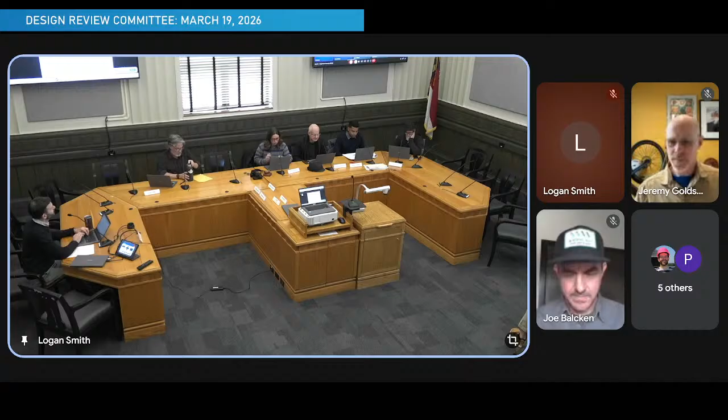And our first order of business is a formal design review, but before we get into that, I wanted to let you know that I will be stepping down as chair as my family and I are relocating. So at the next meeting, you will vote on vice chair and chair. I've enjoyed my time, so thank you.

And the formal design review is 50 Coxe Avenue, and Will is going to present that for us.

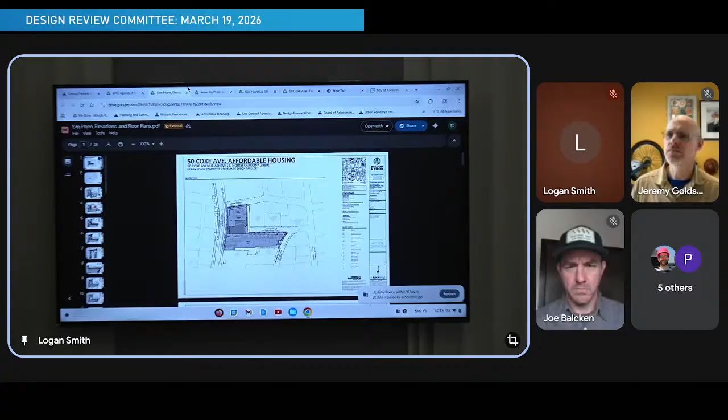Thank you, Chair. Good afternoon, members of the committee. Will Palmquist with Planning and Urban Design. I will be presenting this design review for the project known as 50 Coxe Avenue. I want to welcome our applicants here today and say we're excited to present this project. It's a mixed-use affordable housing project proposed on Buncombe County-owned property. We've been working with them as partners as best we can, and we're glad to be here today to present this project. I'll go over an overview of the project, go through some of the staff analysis and recommendations, answer whatever questions you have, and then I know the applicants want to be able to present some information to you all too, and they'll be available for any questions you have as well.

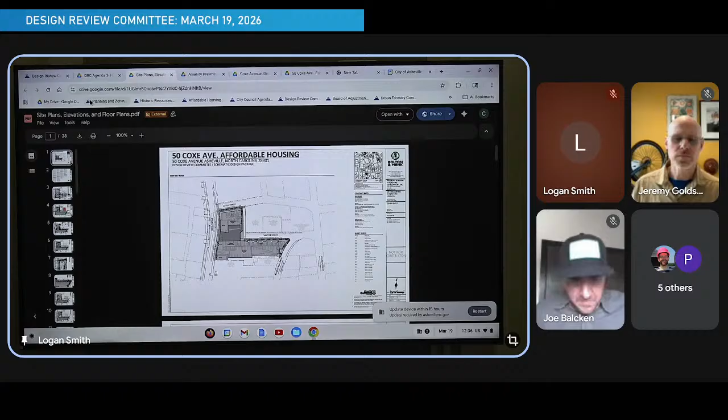So just to get started, I'm going to be referring mostly to the site plan drawings. As mentioned, the property here downtown with the main address of 50 Coxe Avenue, is located across 3 properties owned by Buncombe County. They're used for administrative offices and such for the county, but I don't believe they're active right now.

The project is zoned CBD. It's located outside the traditional core. It's in the tallest height zone, and then it has multiple frontages on streets, one of which is Coxe Avenue, which is a key pedestrian street, which has some special implications for design guideline standards and UDO zoning requirements. So that's kind of the main primary frontage of the site. There's also frontage on Aston Street, Sawyer Street, and Ravenscroft Drive. Additionally, there's an alley that exists between the property and the existing building to the east that'll be proposed for circulation around the site as well. I'll talk a little more about that in a minute.

So here you can see the site plan proposed. Overall, it's a 7-story tall mixed-use building with 203 multifamily units and about 5,000 square feet of retail space on the ground floor. The overall building area is 251,000 square feet. There's also 121 spaces of parking, structured parking, proposed in 2 levels. The building itself is an interesting design. It's kind of an L-shaped building, and it does span over the former section of Sawyer Street, the right-of-way of which was officially closed about 2 years ago.

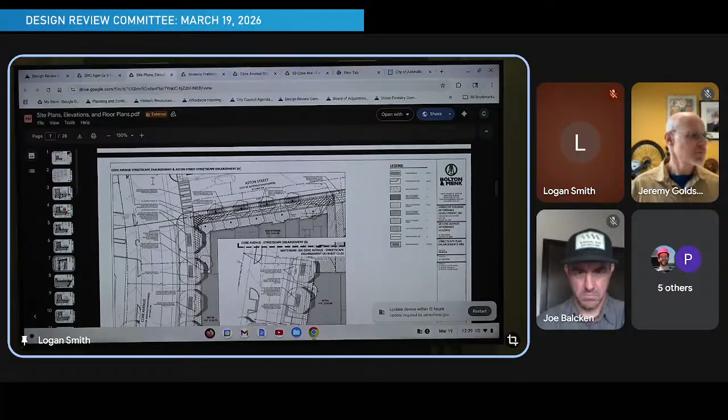I'll scroll down a little bit here too. You can see some closer-in views of the streetscape plan along Aston Street to the north and then Coxe Avenue to the west in particular.

This project is kind of interesting because it's being designed at the same time that the city-led project for the Coxe Avenue streetscape is underway. It's a project being led by Capital Projects in our city, and it is a redesign of the entire streetscape and cross-section of Coxe Avenue from Patton Avenue to Southside Avenue. They're currently around the 75% design phase. So this project team has been working closely with our capital project folks and consultants to incorporate the proposed cross-section, right-of-way, sidewalk, and street tree locations so that when they build the project, they'll be able to do it in a manner that complies with that overall streetscape vision.

So I provided some more information about that project in the folder, but it's essentially wider sidewalks, travel lanes, and then an uphill climbing bike lane on what would be the east side of Coxe Avenue. You can see here the proposed sidewalks, they vary between 10 and 12 feet along all the frontages, and then there is a 6-foot wide sidewalk proposed along the alley connection.

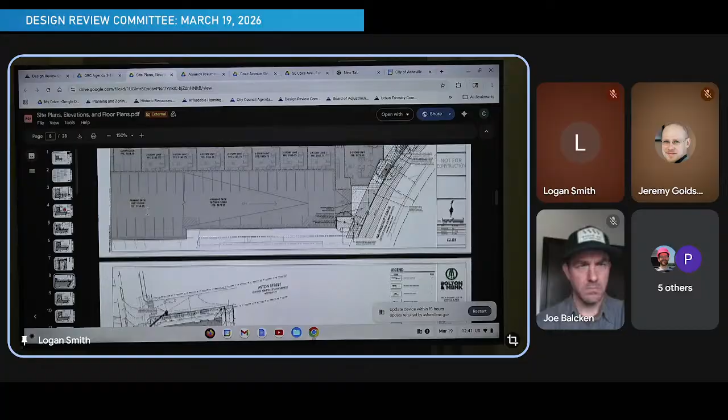Speaking more broadly about the circulation around the site, it's a little peculiar with the closing of Sawyer Street, but because there is that alley that runs north, it will allow any vehicles traveling down Sawyer Street to the west to head north up that one-way alley, get onto Aston Street, and then be able to go either direction from there. So they won't have to turn around or do a three-point turn or anything. That'll keep the vehicular motion through the site relatively coherent.

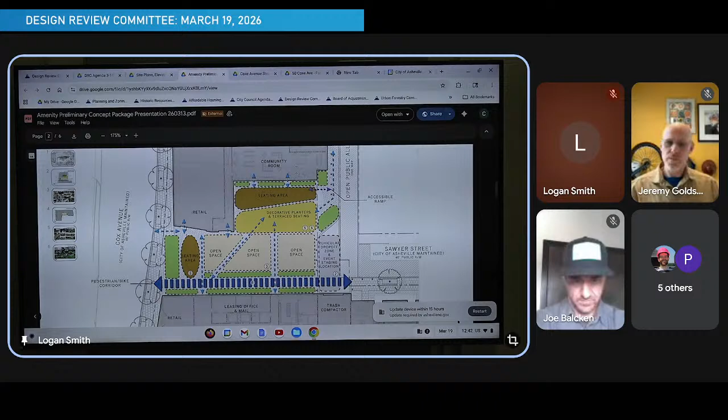So there are some unique aspects to this project, as previously mentioned. I'm going to flip to the amenity plan package that the applicant sent over, and they'll probably speak more about this, but just to give a brief overview of some of the concepts being proposed for that plaza space beneath the building. You can see that the main pedestrian bike corridor will run through this area of the site to connect Coxe Avenue with the sidewalk on Sawyer Street. There's also some room for what they're calling a vehicular drop-off area and event staging location for any kinds of programming that happens in the space, with open space area, seating areas, and then decorative plantings and some other terraced seating in this portion of that area. It will be, just a note, covered by building for the majority of this area, so any kind of plantings or anything will have to be very carefully considered to ensure their viability.

Also, there are some illustrative images. I'll let the applicant team speak more to that.

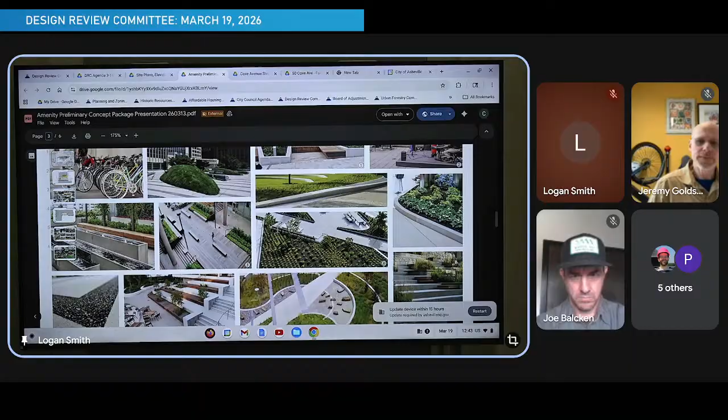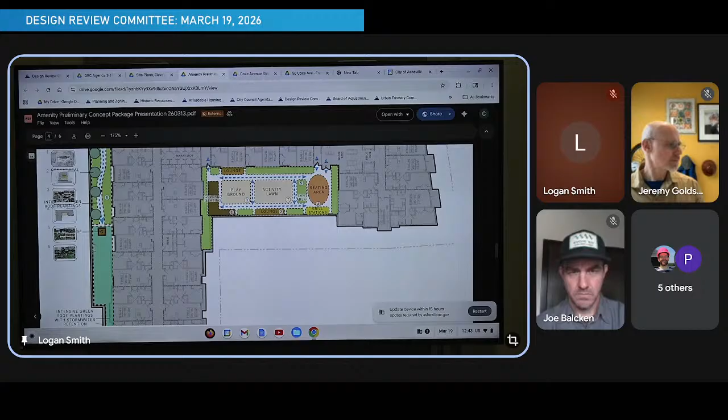On the third floor of the project, there is a proposed amenity area in the central part of the building. There's also a green roof proposed on the southern part of the building, north being to the screen right. That area will have stormwater infiltration and treatment retention capabilities in order to collect and treat the rainwater that falls in that portion of the building.

So if you go to the floor plans, we can see that illustrated here as well. This is the first floor plan. It shows access off Coxe Avenue to that one level of parking deck.

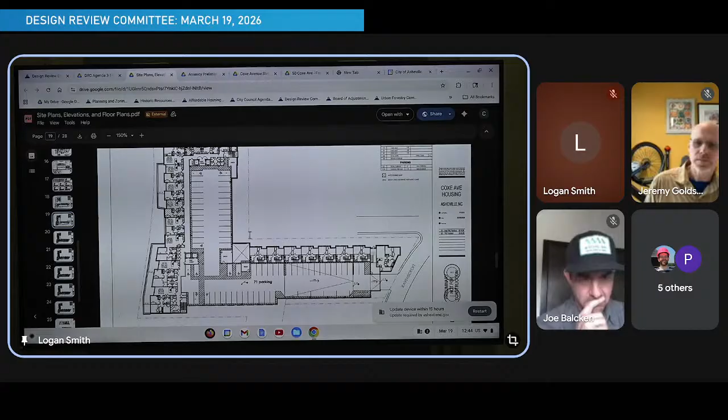You can see the recessed area between the buildings on the first floor where the plaza is. The second story demonstrates access off Ravenscroft, with the parking structure that follows along the building footprint to the west and the north as well. The third floor plan, on top of that parking deck, is where the rooftop amenity is located, and then that green roof on the southern side.

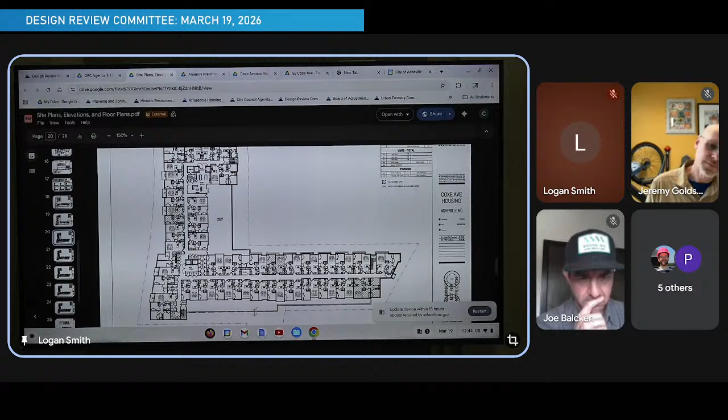And then I will flip to the elevation drawings and speak through these briefly as well. I mentioned the materiality proposed for the project. I'm going to go to the main elevation on Coxe Avenue, if I can get it to behave.

Some materials proposed include a brick running bond pattern along the first story of the project. There's also fiber cement siding, cementitious board with metal reveal, and then that glass storefront system you see for those retail spaces. You can see those identified on the two sides of the parking garage entrance, and also the one side on the other side of the plaza.

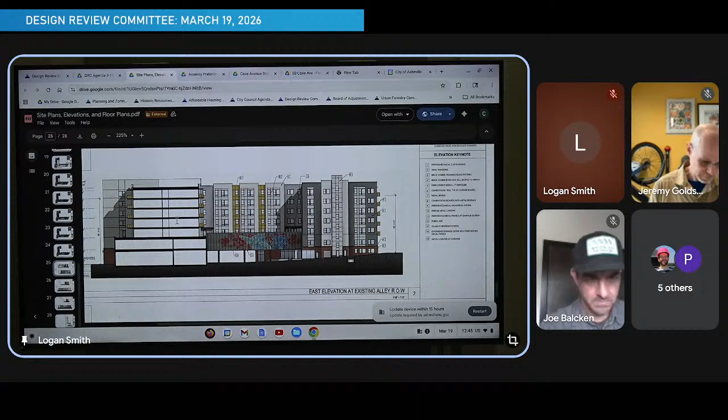The other elevations are a little hard to visualize because of the interesting geometry of the building and the site itself. But essentially this would be looking east, as if you're walking from Sawyer Street to that recessed pedestrian area. You can see there's a screening element on the second story of that parking structure, and then the cross-section of the building that runs east and west is located here.

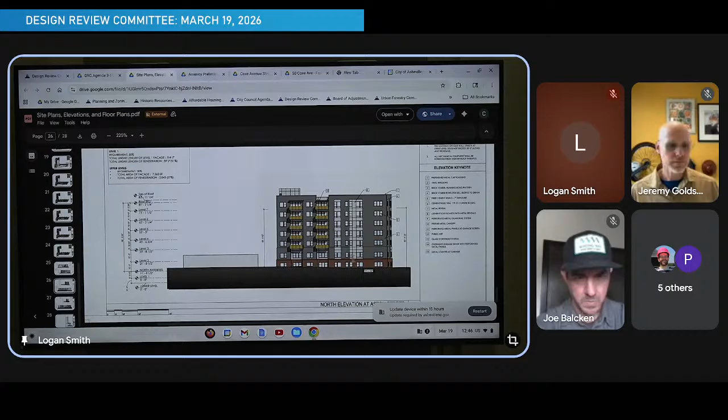So other views of the building - this is the north elevation. If you're walking down Coxe Avenue to the south, you would see this on the left side there. And then another view at Sawyer Street itself, so you can see the L-shaped building.

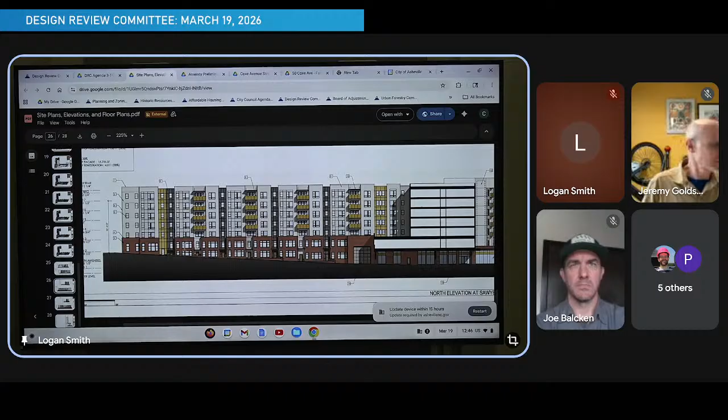Another interesting element of the project is that along Sawyer Street, there are proposed to be these townhouse-style units. They're 2-story tall units, designed a bit off of the building as a different type of residential space. You can see those here off of Sawyer Street - there's, I think, 8 of them.

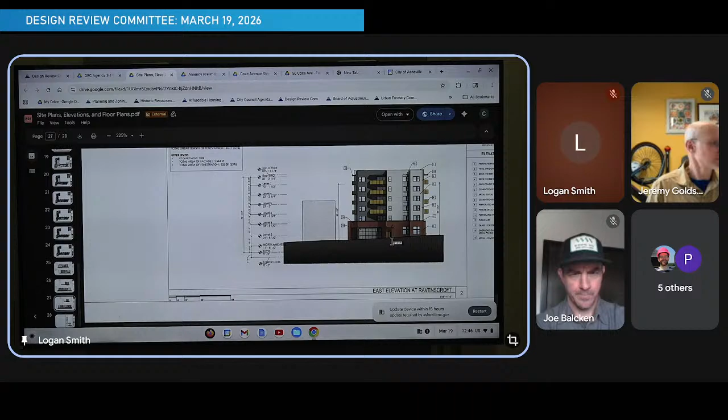This is a view on Ravenscroft Drive, and you can see that entrance to the parking garage there. And then finally, the view that you probably wouldn't see because there's buildings in the way - this is the south elevation. So if you're walking on Coxe Avenue going north, you would see this off to the right. So I hope that's oriented you all to the site a little bit better.

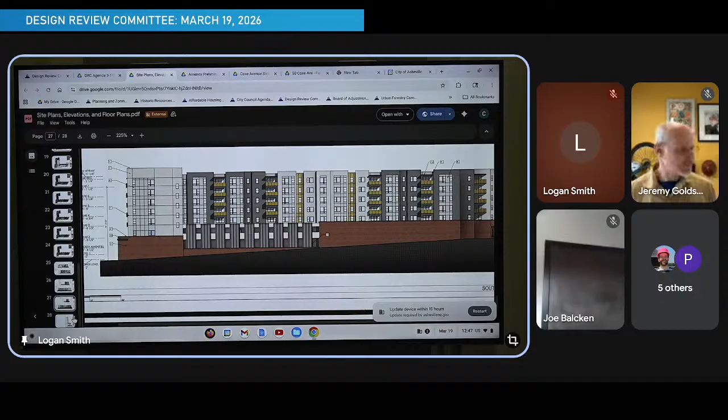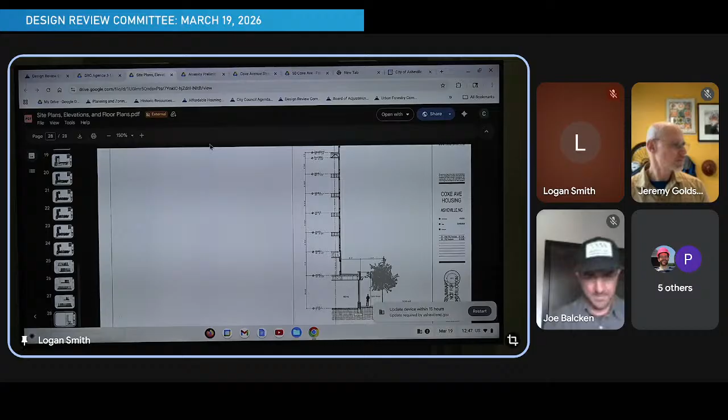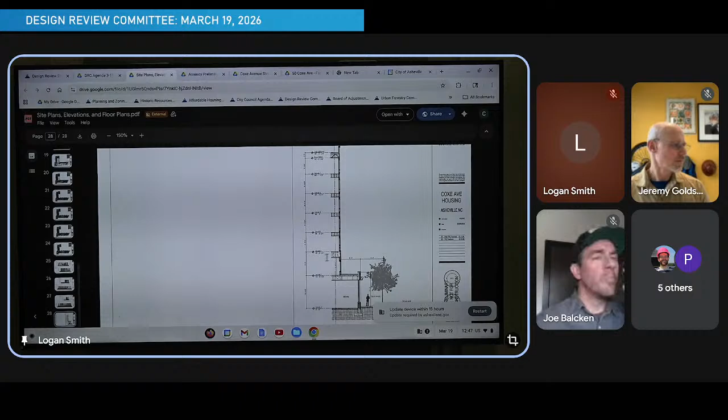Some other technical aspects of the project: it's largely in compliance with standards such as the UDO requirements for the CBD district, as well as the downtown design guidelines. There are a couple of technical modifications to the zoning requirements that the project is requesting, which will go through review mainly by the Planning and Zoning Commission and then ultimately City Council, if they approve the project with those conditions. One of which is regarding the setback and the street wall height for the portion of the building along Coxe Avenue.

In the downtown, all buildings are required to basically step the building back 10 feet, so you have this recessed area to provide relief and not have buildings looming over the street. It's required to happen based on usually the width of the right-of-way, or at a specific height if you're in a certain area of downtown in the traditional core.

Also, all buildings in the downtown are required to be 2 stories in height, and this has been interpreted to mean that all portions of new buildings have to be 2 stories in height. This project is proposing a 1-story step back. Based on their design, the floor plan, and that sort of thing, they felt this was the best design and appropriateness for the project.

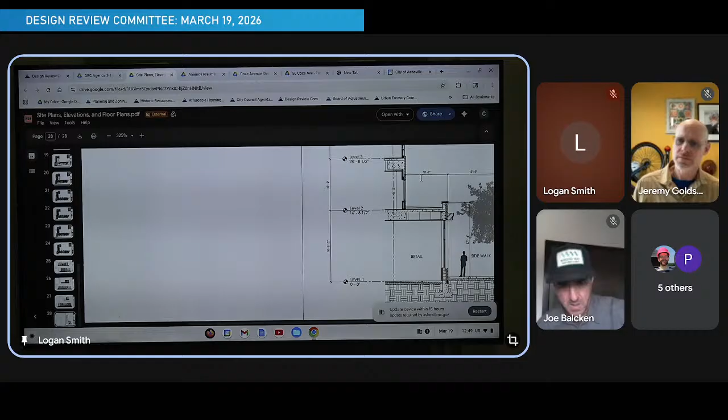So you can see it outlined here that the retail space is located here. There's the 10-foot minimum step back for the building relief happening right there at that second level, so that would have to be a modification to the zoning since that does not technically meet that requirement.

Question: the 10-foot doesn't, or the 1 story? Answer: the height, the 1 story. Question: the 10-foot does, though - that's still the first request? Answer: Yes, this one issue. It meets the requirement as far as the 10-foot depth, and then along at least two-thirds of that frontage, so that's in compliance. It's just that technically it'd have to happen at the 2nd story or higher.

So it's a design element that you all can consider, but the ultimate decision about whether that's an allowed modification would be up to City Council and considered by Planning and Zoning Commission as well. But obviously, it's a design consideration for you all today.

The other element, which is less of a design element, is regarding the tree canopy protection requirements. Tree canopy protection involves either the preservation of trees, the planting of new trees, or paying a fee in lieu instead of doing those other two items. This site doesn't really have any trees on it. There's really nothing to preserve, and the opportunity to plant is limited. The fee in lieu can kind of add up when you're downtown. The per square footage cost is relatively high compared to other areas of the city.

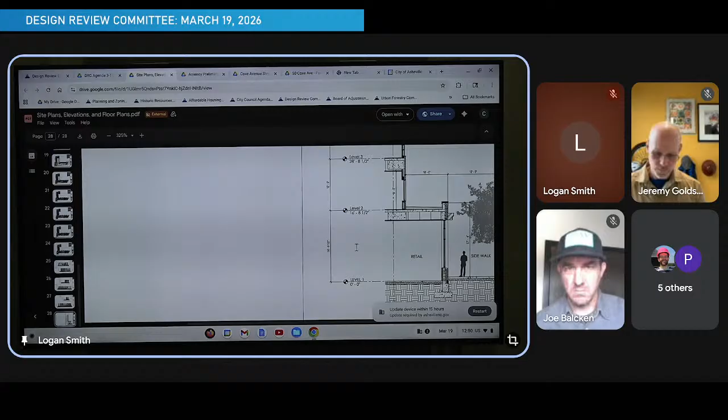So what the applicant team is requesting is that they will provide as much tree canopy on site that they can plant. And essentially, if the proposed street trees can count towards that new planting, which typically does not for projects, then they can meet the requirement. So essentially they're asking for a reduction in the fee in lieu, but acknowledging that the street trees are new tree plantings that will function as new tree canopy. So that's a UDO requirement that they're also asking for modification for. So those are the two technical modifications being requested through the conditional zoning process.

As far as the downtown design guidelines go, I won't run through all of them specifically. You can see in the staff report that they are compliant and in alignment with the vast majority of the downtown design guidelines in regards to things like layout, height and massing, facade relationship, materials, and the fenestration requirements that we didn't talk about, but they do meet and exceed the minimum requirement for windows and doors and other openings for the ground floor and upper stories of the building. And also, they even meet the recommendations for things like rooftop terraces and green roofs.

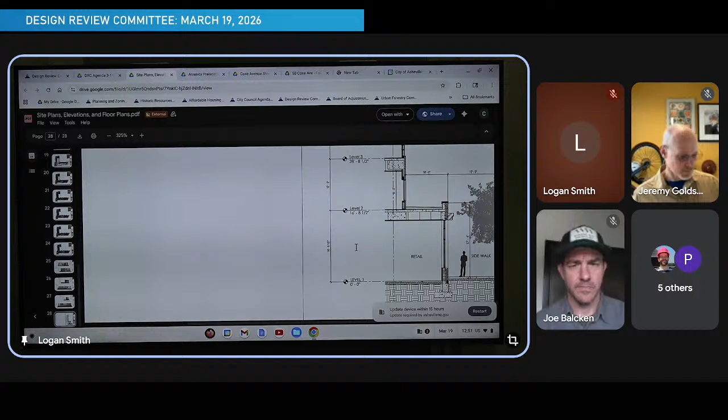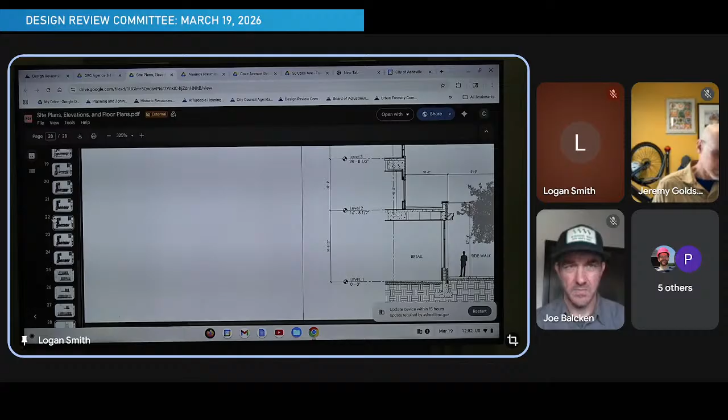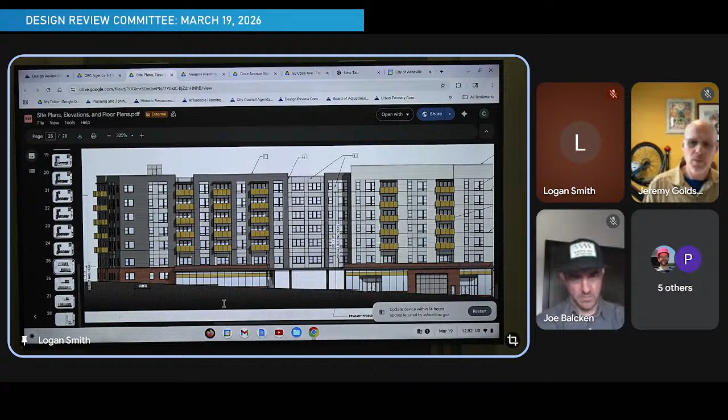There are a couple of recommendations in the downtown design guidelines that the project is only partially or not aligned with. One involves, and this is maybe splitting hairs a little bit, but it's worth noting, the elevation along Coxe Avenue. Along that key pedestrian street, there is a requirement that basically the building covers 80% linearly of that lot area. Since the building has this recess, but there is building above it, technically it meets and exceeds that requirement by plenty. If we subtract that recessed area on the ground floor, it gets right around 80%, just based on my calculations.

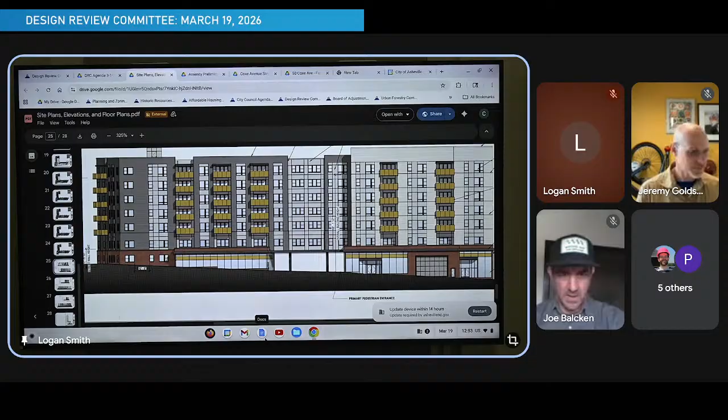So just wanted to note that the recess does subtract from that first floor coverage area, but it still meets the requirement of the UDO regarding that. It's just worth noting. The other element that is not in alignment with the downtown design guidelines regards the vehicular access, which should be placed along a rear service alley if one is present. That's not the case for the two parking garage entrances, one of which is off Coxe Avenue, which is a key pedestrian street, and the other one's off Ravenscroft Drive. And finally, the minimum height requirement of two stories is not met for that one section of the building along Coxe Avenue, as we talked about.

So the project is before you today for its formal design review. It was before you all on January 15th for an informal review. A number of comments were suggested and considered by the applicant team. I think some were addressed, some may still be outstanding or weren't able to be fully addressed, but those are listed in the staff report for reference. In the meantime, the project received approval with conditions by the city's technical review committee, which is the staff review for technical compliance to codes and standards. Following this review, it would head to Planning and Zoning Commission for consideration of its conditional zoning request, and then finally City Council for final approval.

I think that's it for me. I'm glad to answer any questions you have, and we also have the applicant team here to give a presentation and answer questions about the project design itself.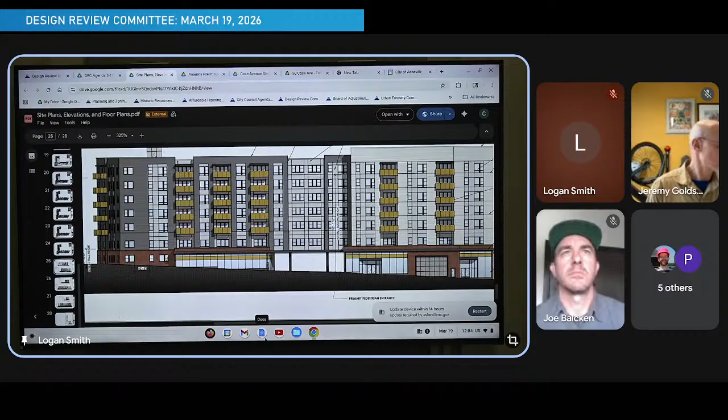Thank you, Will. You're welcome. Do we have any questions for Will? Okay, I think if the applicant could approach the mic.

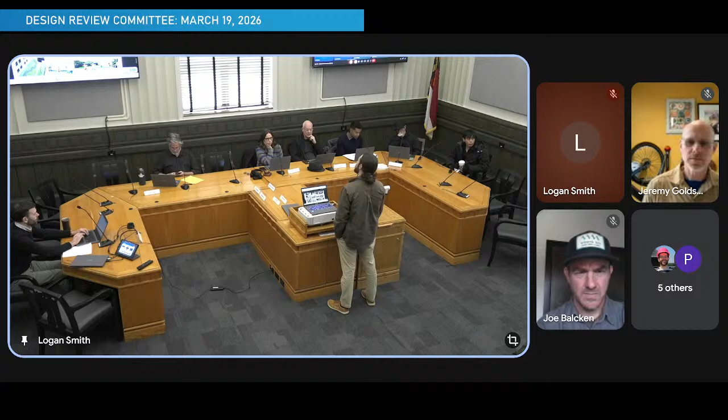And then our materials - these are not finalized, but we're thinking a mix of scored concrete, decorative curbs, and lots of interesting patterns in the space, considerations to lighting, and several options for seating, while also being conscious of the landscape material that will thrive in the site. We understand, as you do, that our main amenity area is underneath an architectural roof, so we have to be very conscious of what will actually thrive in these spaces. So I think that gives a decent overview of the site.

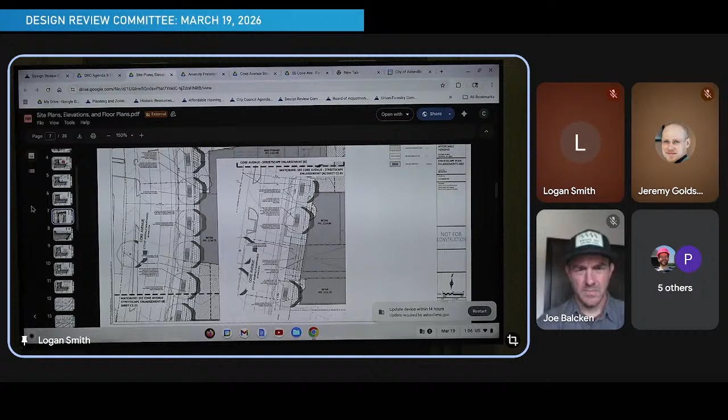Do you have any questions for me, or do you want to turn it over to architecture and let them give you an overview of what they've done? Let's comment on site first, and then we'll look at architecture. Okay, next.

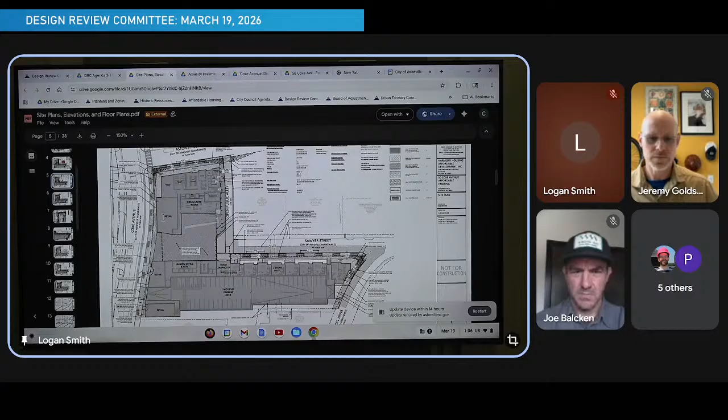All right, I guess I have a couple questions. I don't know where to start, but I guess just starting, this is definitely an improvement from the last one in terms of... Sorry Gabe, can you speak in your mic? Yeah, they're very finicky - that way everyone can hear and on the broadcast. Is that better? Thanks, okay.

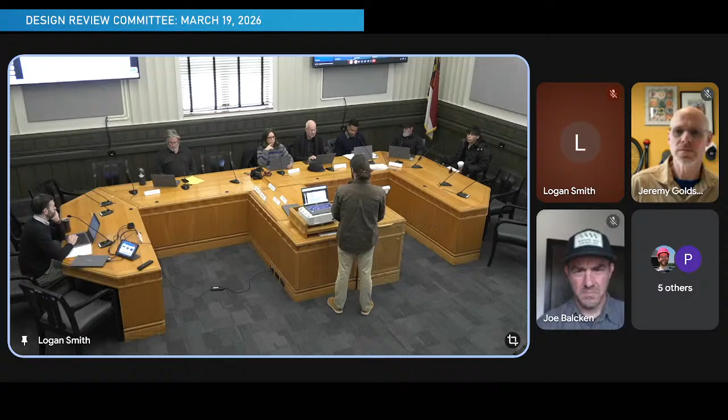I was saying it's definitely an improvement from the last one. One of the main things is scaling back the building, like you had said, and allowing for more planting area, more pervious surface space. Starting on Ravenscroft, I definitely appreciate, and I'm sure the adjacent building appreciates, the room - extra room between their building and the garage. At one point it was only like 6 feet, and it was really, really tight. So having 13 and a half feet is definitely a lot better, and it's great to see that you're communicating with that client, with that property owner.

One of my main questions is the route for the public alleyway. I'm assuming the trash compactor is going to have to come in from Ashton Street. So we actually are doing the reverse of that - that's the reason for the large bump out next to the trash compactor. So we do envision it to come in on Sawyer, pull in there. We've run a few turning movements. Okay, and then the alley is more of an exit strategy. Okay.

And I understand the want to have that drop-off space. I just don't see it functioning, because if you're coming down Sawyer on the right and you want to turn in to do a drop-off, at that point you're past the drop-off. Are they kind of envisioning they reverse back in there? Yeah, ideally we're trying to keep vehicles out of there, only as needed. It's more functioning for practical access uses for the trash compactor. Okay.

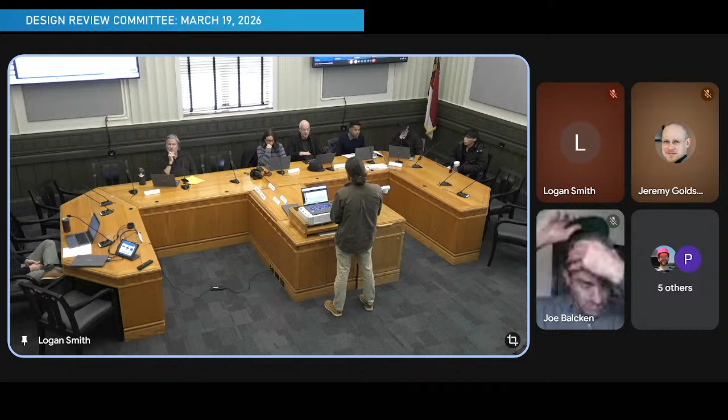I'm kind of curious why you are linking several of those townhouses together and not bringing planting up. I know the units where there's a pathway dug in towards the east to get to that far eastern unit, you're actually going below the sidewalk level, as I understand it. The one to the left of the entrance, the building entrance — I get that you have to create a paved entrance to the front door. But the other two to the left are elevated platforms with stairs on one end and at grade on the other. I'm wondering why you wouldn't separate those two building entrances and bring the plantings up to the building to create a little more privacy.

Are you talking about these two units? I guess the ones below ground you can't change. But if you go the other way, right in front of that unit, why is there an elevated podium connecting two entrances to two separate units instead of bringing landscaping up to the building?

Brett, I can comment on that. We're really struggling with the existing grade of Sawyer Street, so we're kind of maintaining that and tying into it. I believe it's also tied to the architecture above, maintaining that second level. I can let the architecture team speak more specifically to that.

So am I reading that correctly? That's right — the street is sloping down, and there's an elevated platform with stairs on one side and at grade on the other, and you can basically walk on that elevated platform from one front door to the other. That is correct. That's a landing serving the two units that you have to step up to, because the street slopes pretty significantly down towards the amenity space. Okay, gotcha.

Brad, can you hear me? We can barely hear you, Phil. Sorry, guys — this is Phil Kiester with Heis Keister Architects. We appreciate everyone's time today.

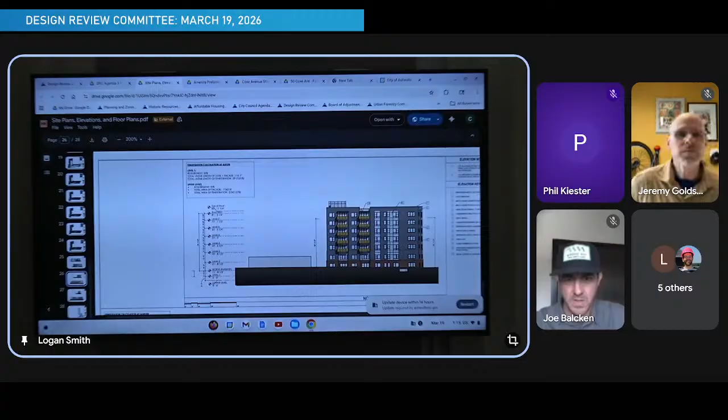It's helpful if you show A3.2, I think, the north elevation at Sawyer Street. Your hatch is a little confusing - your planting hatch looks like a paving hatch, by the way. Yeah, if you kind of zoom in, that was helpful for me.

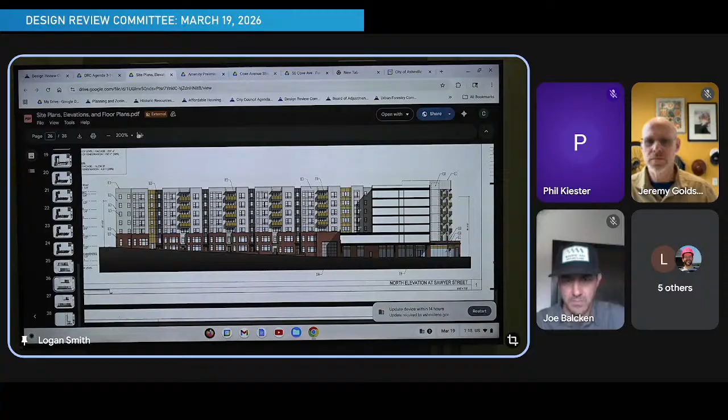Again, I think this is really killer view, and it just could even get better, I think.

Will, I understand the width - never mind, I'll pick that up later, sorry.

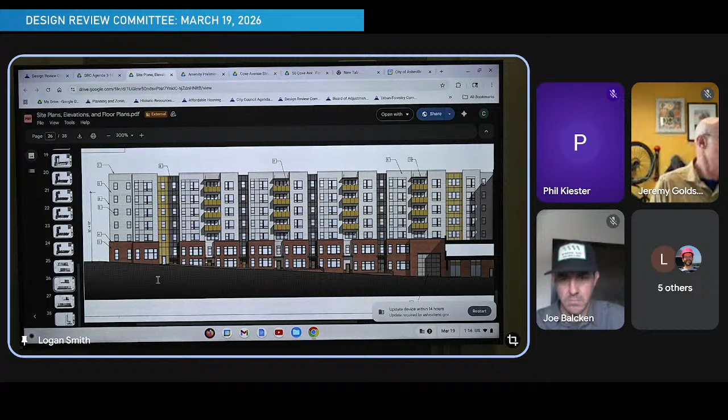Do you have more comments on site, Michael? No. Okay, do we have any other comments on site? Move to architecture. Yeah, thank you. Joe, thank you. Jeremy? Good? Okay, yeah.

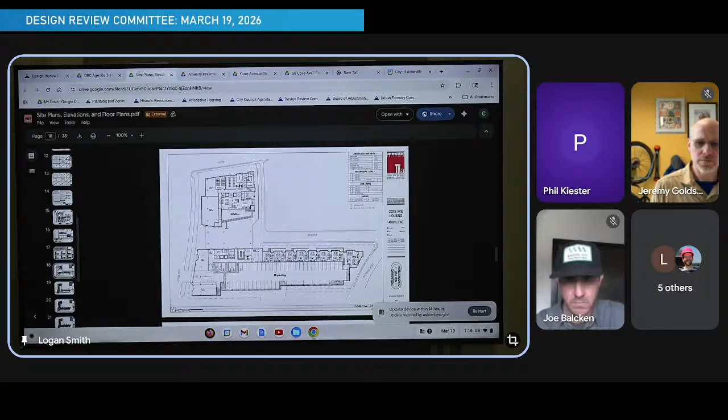And so Phil is online with architecture. Phil, would you like to run through the architecture? Loudly - yes, can you hear me now? We can barely hear you. Oh, boy, how about now? That's better, okay, thank you so much.

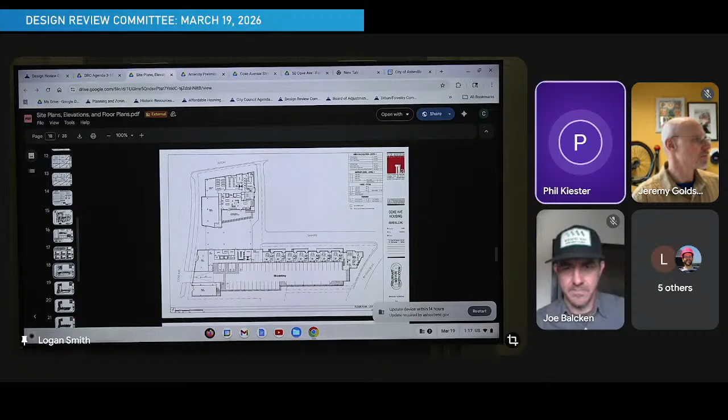We certainly appreciate the opportunity today and appreciate the follow-up from our January meeting. As always, we're trying to work to develop a better project here for the residents, create really desirable homes for these folks who are certainly deserving. So this is a big project with a lot of moving parts, as you guys are aware, and we're trying to get the right pieces in the right place. We certainly don't have a finished design, but we're looking forward to working with your comments to address everything we can, given this is affordable housing in a downtown location.

So I'll just touch on a few of the items, similar to what Brad did in his process of going around the building, just so you can understand the differences between this presentation and where we were in January. I think we've really touched all aspects of the building here, again trying to address your comments and make it a better overall project.

Some of the bigger picture items - one item discussed last time was the definition of a high-rise for the building. We worked with the Fire Marshal to lower the building approximately 3 feet and now have an exclusion from the high-rise requirement. So the overall building massing has been reduced since your last meeting by about 3 feet, and we are now under the high-rise requirement, which is certainly a great benefit to the project given the high-rise implications.

We have really addressed all the elevations, going in the same order as Brad. If we start on the south alleyway side, we've increased transparency there, and we've also pulled the building back from the adjacent neighbor. We're now over 13 feet, letting in more light and air. We've also included in that upper elevation the adjacent building suggestion to give you an idea of how we relate to the neighbor.

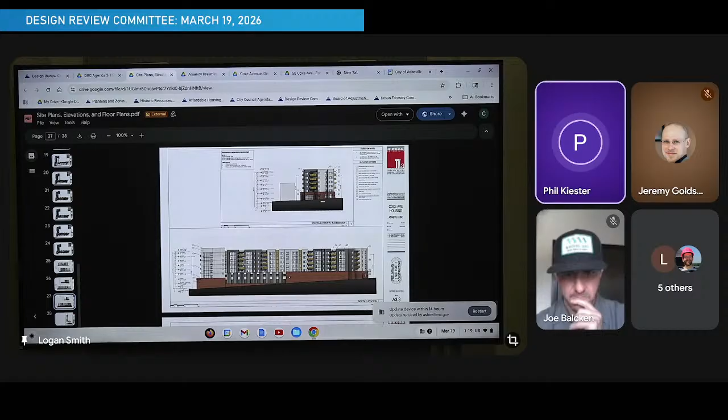This actually came at the cost of some parking for the project, but we felt like the adjacency and the access was more important. We did lose a few parking spaces, but I think we have a better design.

Phil, is the parking that you currently have on the project the minimum required, or is it over that amount? Yes, so I think, and maybe Brad can speak to this too, we do not have a parking requirement for this site by right ordinance. The parking that we do have is for residents and visitors. There'll be some visitors, but we have discussed with the Housing Finance Agency, who's partially funding this project - they have specific requirements as well, and we're in compliance with their requirements.

Are you in compliance or are you over compliance? Well, technically by housing finance standards for a family project, we're required on a non-downtown site to have 1.75 spaces per unit. So in that regard, by straight ordinance from them, we are not in compliance. But they almost on every project we work on grant waivers for the parking, given the specifics of the project.

Okay, and just to clarify again, that's a developer requirement? It is a lender/funder requirement. Meaning the county? No, it'd be the state agency that offers the tax credits that incentivize the development of the project.

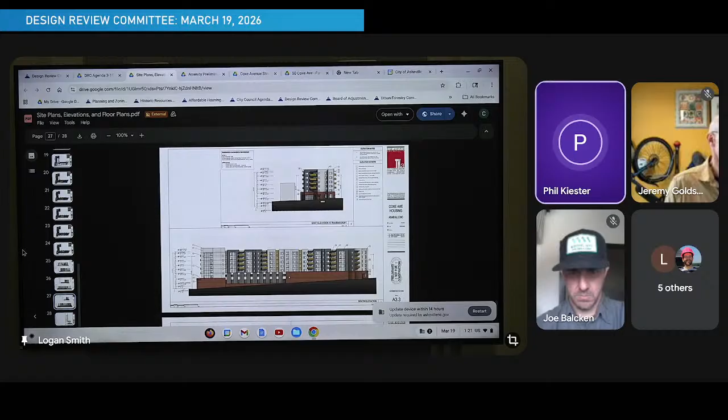If we come around to the Sawyer side, as discussed, there were good questions before about access to those units. We've reworked those entries, which you see at the bottom of the page, and enhanced the streetscape area in that location. We also worked with Brad's group and the fire marshal to figure out the fire access along the temporarily titled Sawyer Alley. We adjusted the building there to get the required dimension for fire access and pedestrians, so that is improved as well.

If we look at the Aston elevation, as Brad mentioned, we pulled the building back there and increased the transparency. We have more side yard dimension and also landscaping, so I think we have a little better feel along that side as well.

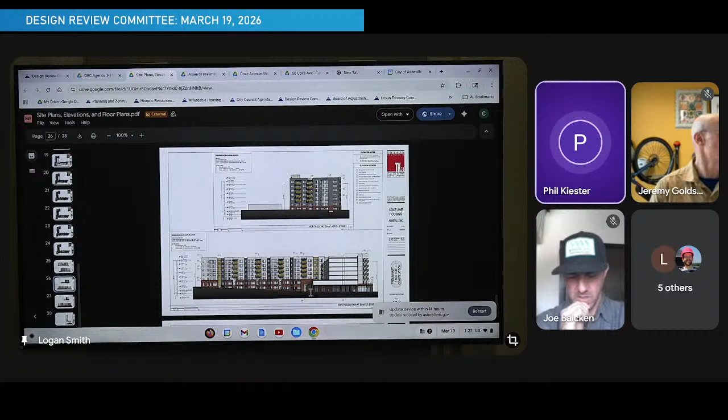Is the garage on Sawyer Street going to be open most of the time? The door shown on Sawyer is actually for the trash compactor. If some of you remember, we had that on Coxe at the southwest corner previously, and rightly so, there were comments about that. So we've moved the utilities more to the center of the site.

So does that door only open on trash day? Yes, it would only be open when it's being serviced. What drives the size of that door? It's a really big door. Can we shrink it? Possibly. The owner's working on it, and David Williams is on the call today. It's really a matter of the function of the equipment that needs to service that. As you're aware, we have over 200 households here, so they're going to generate quite a bit of trash, so it's really dependent on volume and schedule.

But we'd love to shrink it.

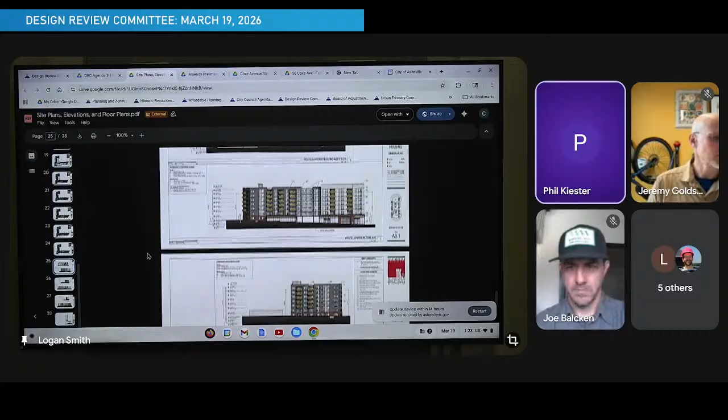Just following up on the infrastructure issue, if we can go to the Coxe elevation. Last time we met, on the right side of this drawing, we had the driveway entrance. We also had the compactor there, and certainly had some challenges. As mentioned, we moved the access for the compactor and also the transformer interior to the project now, so they're no longer on Coxe, and you can see in this elevation that allowed us to break down that southwest corner.

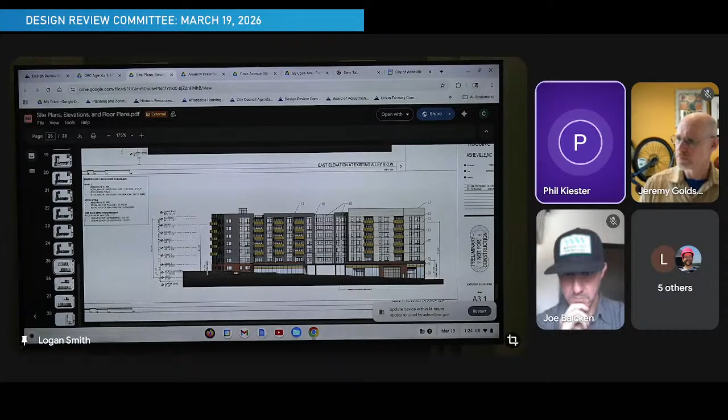We now have a retail space there that is very transparent and makes that gesture to people coming up Coxe from the south. One of the comments was also about emphasizing the entrance to the project, which is really our space in the middle that goes to the plaza. We tried to push that back and also create more transparency to each side to make it more inviting for residents and members of the community.

I did mention transparency. I think we've increased the transparency on every side, and I believe we are now in compliance with requirements as far as glazing on all our elevations.

There was a discussion about the step back requirement being 2 stories. We did consider that. The issue here, as you can see on Coxe, is that due to the depth of the section, we have residential units on that second level, and adding additional depth makes those very challenging from a programmatic and layout standpoint. So given the elevation change in Coxe, we felt this was a reasonable compromise. We've increased the transparency and adjusted the retail entry doors given the 8% slope of Coxe. We're still working on things, but I think we've made significant progress from last time, understanding this is still at a schematic level.

I'm sorry for the nickel tour there. I'm happy to answer any questions the group may have.

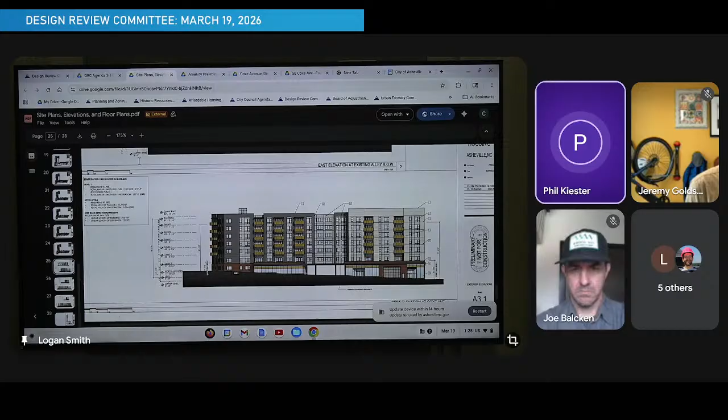Phil, I have a question back to Coxe Avenue. I understand the width for the parking garage access on Coxe Avenue is 24 foot as mandated by the city. It also seems very tall. Is there a minimum height requirement from the city that's dictating the height of that garage door?

No, sir, I think we can probably look at adjusting that. As you know, we usually have a requirement of 13 feet for emergency vehicles. I believe we could possibly have the emergency vehicles access the building from the plaza side off Sawyer, and that would allow us to possibly bring that door size down. Certainly we understand not wanting to have a large hole in the building if we can help it.

And maybe push, if you can't decrease the height too much, maybe recess it a little bit, so you're reading the void. It appears the door is almost flush with the skin of the building, which seems kind of harsh on the streetscape. So if there's any way you can use your bag of tricks to soften the impact of that garage door, that'd be awesome.

Yes sir, certainly. I think we could turn that opening in a little bit, as you allude to, and create more of a two-part element there rather than just one plane.

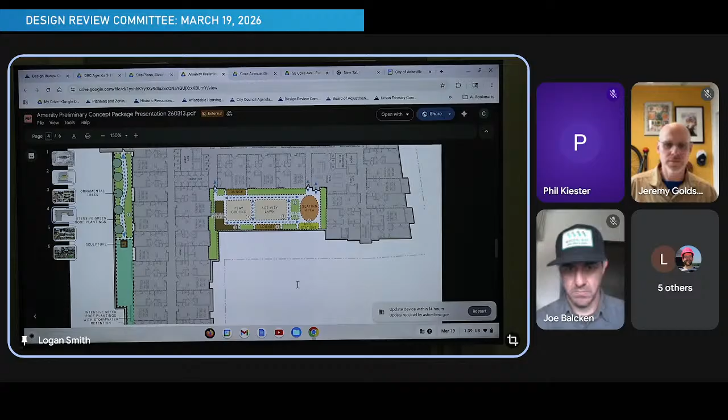You have a lot of space up front, like you said—even grouping smaller trees together could increase that count. It may not be big canopy trees, but smaller trees that can fit 15 feet apart could probably get you close to hitting that mark.

I'd like to add, one of the constraints along Aston Street is an existing overhead power line. That's one of the additional challenges, so we're limited to smaller maturing trees there. Okay, well they can get pretty close—15 feet, 12 feet—some of these redbuds and things, so.

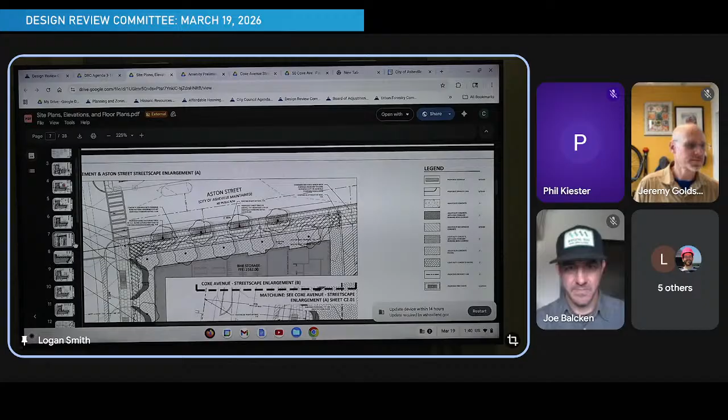All right. Jeremy, Joe, do you have any comments?

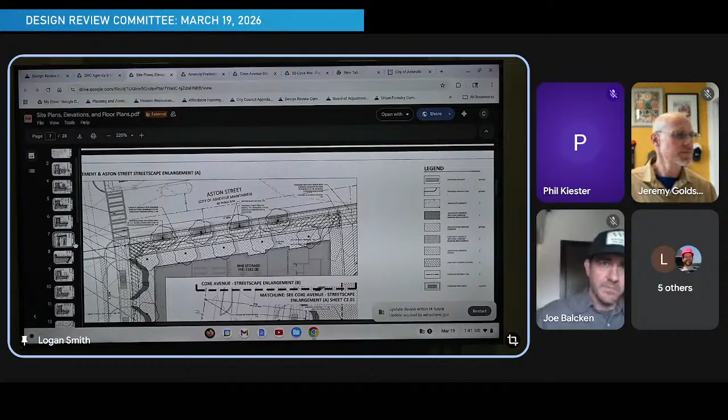Okay, no. I'm kind of curious—this is a county-led project and I think you're with the county—just how this works. You guys are ultimately the client, I suppose, trying to meet some housing goals established by the county. Just curious about our feedback and how that works through the county's perspective, the client's perspective. Is this process making the project better? Are you guys happy with it, all of that?

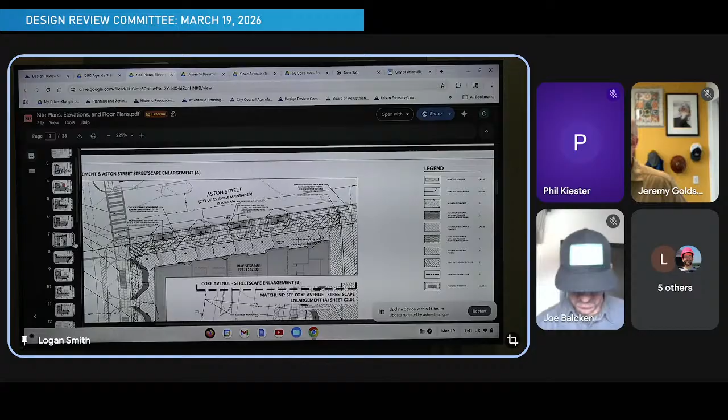Yeah, this process is definitely making the project better for sure. This has been great, and we've been able to incorporate a lot of your feedback into the plans, which is awesome. We've been working with the School of Government Development Finance Initiative to look at all county sites. We did this a few years ago—Coxe Avenue was probably the number one site the county owned that we could develop into affordable housing. We have a goal of, I think, 1,800 units by 2030, so this is just one mechanism to reach that goal.

We also have the Affordable Housing Services Program and some other things we're doing, but this is new—the county's never done this before. We have the Ferry Road project going on right now, we have Coxe Avenue, and potentially another one as well. So we put out a solicitation and found the developer partner, Harmony Housing. Harmony Housing is really managing the project and the process, and has hired the design professionals to make sure this project happens.

So we're just partnering with them. We're the property owner and will have a ground lease on the property, and Harmony Housing will develop the building and manage it long term. Does that help answer your question? Yeah, that was helpful.

It's kind of a new thing, and I was kind of curious, and it's good to get that word out there that the county and city land and all that, all the pieces are coming together for housing. It was mentioned about the parking, which, affordable housing, in theory, we're not supposed to encourage people to have the same attachment to their car in an urban environment, income challenge, stuff like that. So what's the perspective in terms of trying to figure out ways to de-emphasize the impact of the car on an affordable housing project? Yeah, I think the site is great for that because we do have private parking garage on Coxe Avenue. We've got the public parking garage up the street. We've got on-street parking. We've got all these things. We're located in downtown.

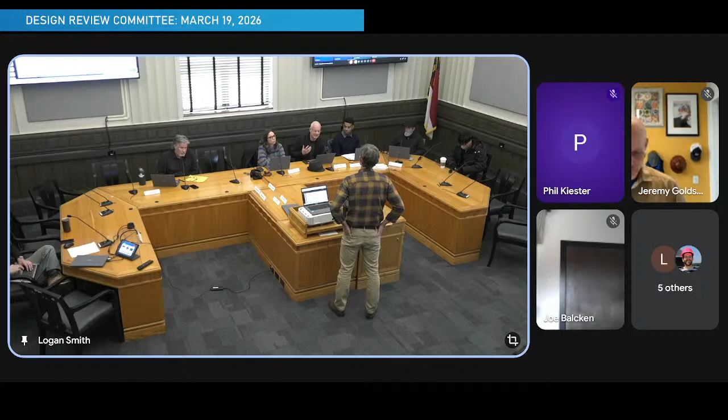Well, gosh, I would encourage you to push as hard as you can on the financing that is establishing the parking. I mean, you're right across from the bus station. What better project to kind of bulk up the value of public transit than housing right there? So keep pushing hard. Yeah, absolutely. Thanks. Thank you.

I got a question, might be for Will and for Bolton as well. Is there a parking deck screening requirement that is required on this for the back side of the parking deck? Typically, when it fronts a public street. So I think they've provided that on the one elevation that faces Sawyer Street, and then the one in the south wouldn't necessarily be required. Has to face the public street. One of the projects I worked was the Ironwood down here, the parking deck, going down the hill on the side, not the front side. We were required to have screening trees along that.

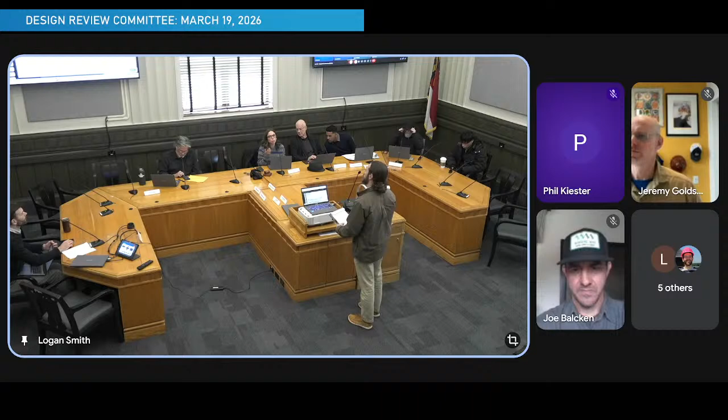And then just looking at that space is kind of surprising. I didn't really pick up on this, but that extra kind of dog leg shaped area to the south of the parking deck, is that going to be used for anything? In some of their images, it shows plantings there. So you're talking about in between the two properties on the south? Yes, yeah, that kind of, yeah.

I would say this area is still in flux. There's a lot of considerations because of the access easement, so we don't have a full-on solution for that area or a proposed design yet. I think there's just a lot of coordination that still needs to happen. I mean, that's a lot of open space. Seems like everyone would benefit from it being usable, used in a nice way. Understood. Yeah, especially since you have access all the way through now to Ravencroft to Cox Avenue.

And it could be used also to catch up on some of the tree plantings that might be required as well. That's a significant space, so. Or walking the dog. Yeah, dog park, yeah, right, just a usable space all around. Yeah, thank you for the suggestion. I think I would just add to that also, lighting that area would be nice. Yeah, it's gonna have undesirable activity for sure.

Okay, so if there's no other comments, we will open up for public comment before we take a vote. So I'd like to open up for public comment at 1:47. Is there any public comment in the room? Please approach the mic and state your name.

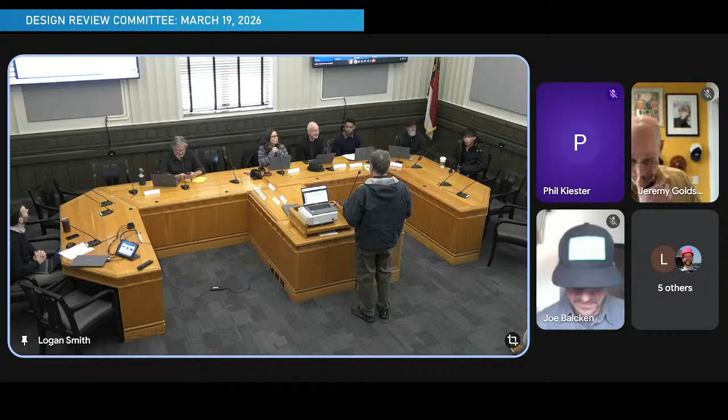I guess that's my narrow question—it's the lender that's deciding what the parking requirements would be per unit ratio. Correct, which is kind of weird that the source of the money is telling us how to build our cities, but that's the reality of it. I'd speculate that comes from these types of projects typically being more suburban. That would be my assumption, but only because I've worked on a few.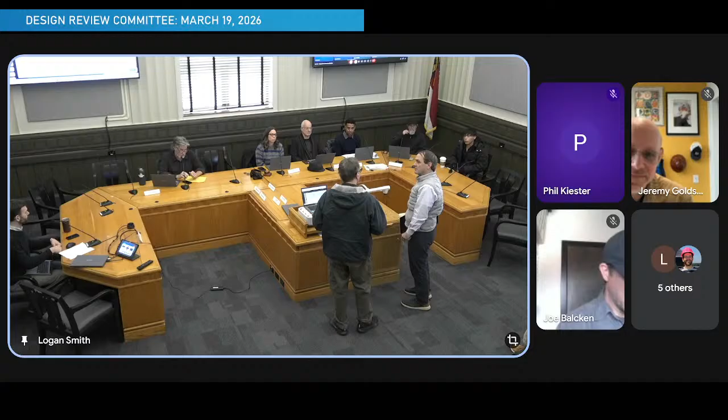How about on retail? On retail it varies—parking for retail in a suburban condition is usually required, but in an urban setting, most codes now don't require parking for retail. This is with a lot of new UDOs in the last 5 years that are more form-based codes. In some cases they do require it, but it's usually a fraction of what's required in a suburban condition. Most urban areas have moved away from parking requirements altogether.

Understood. Thank you. Thank you.

We did have some public comment regarding parking online, which I think we've reviewed substantially. So to close public comment, unless there's any other in the room, we'll close at 1:52. Then we can take a vote, but I did make a note of some items we discussed which we can include.

Give me a minute, I've never done this by myself. Thank you for helping me with that. Let me pull this up.

Should we make a motion first and articulate the conditions? Yes, that would be great. I will make a motion to approve

the project as stated, whatever qualifications or description of the project somebody could fill in later, with the following conditions. Do we have to do that now, or do we get a second? Should do that for the motion. Yep, do it now. Okay, so here, would you like me to read them?